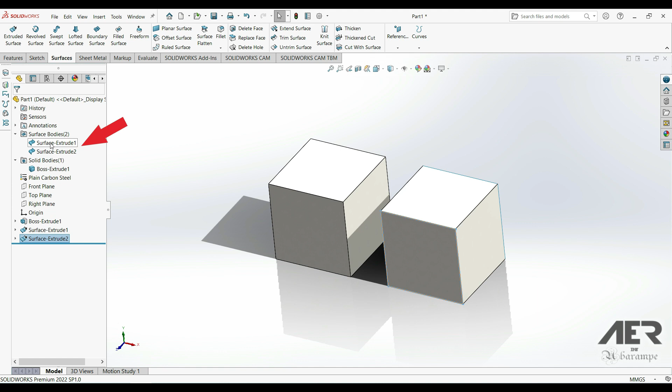So we're just going to quickly recap everything we've covered in regards to SolidWorks surfacing. In the introduction, we made that cube, and we looked at the differences between solid modeling and surface modeling. We talked about first making an outer shell out of surfaces, and then knitting those together, and using that to create a solid. We also mentioned that surfaces have no thickness.

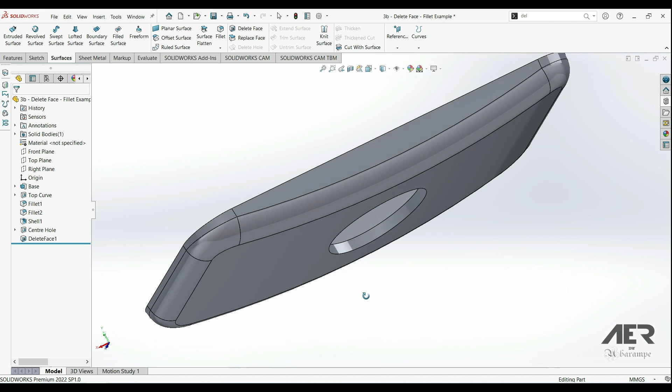Then before we actually started surfacing proper, we looked at the delete face tool. This is great for removing fillets or adjusting holes and openings in parts. Then the move face tool was quite similar in a lot of ways, but this one allows us to offset, translate, or move or rotate faces in any direction. So it allows us to very quickly adjust pre-existing parts. And it can be useful for imported parts where we don't have access to the feature tree.

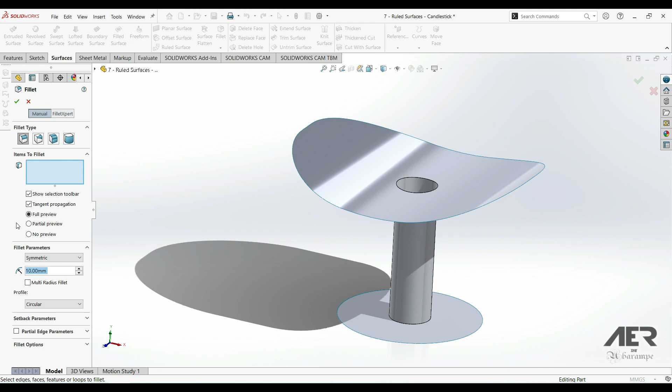After that, we made our first model, the candlestick holder. This was quite a simple one, but we learned a bit about extruded surfaces and how we can trim them. We also looked at the ruled surface tool, which allows us to easily add material in a specified direction. And then we knitted all of the surfaces together, and we saw that we can easily fillet the edges. And then finally we used the thicken tool, which is a great way to convert our surfaces into solids.

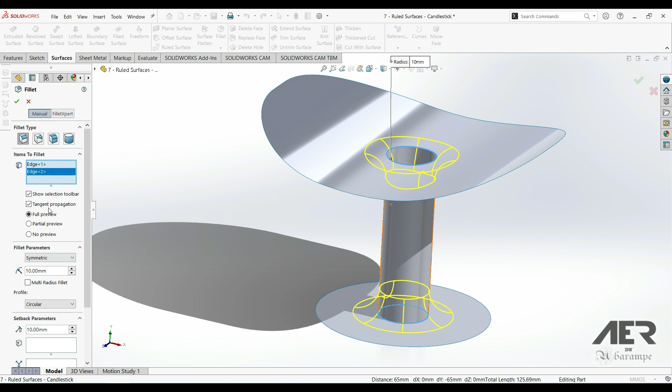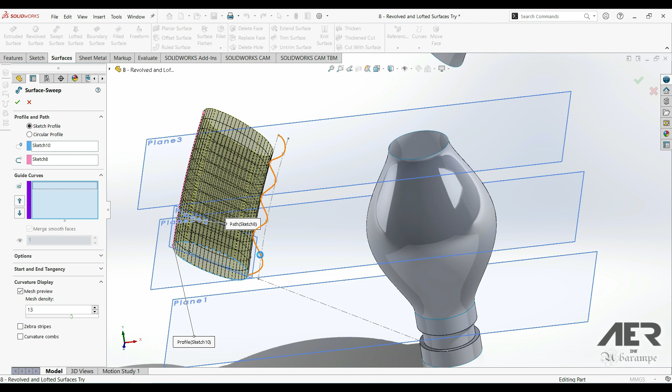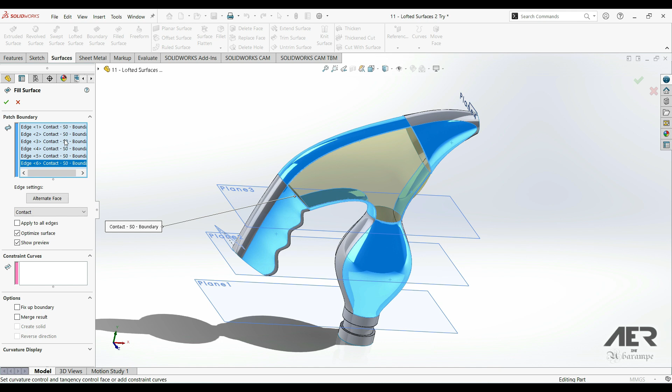Next, we developed the model further by connecting the previous surface bodies using more advanced lofted surfaces. To help create these, we used the split line tool to split surfaces down into smaller multiple faces. Then we also used the filled surface tool, as well as planar surfaces and mirrored surface bodies to close off the sprayer body, so we could either knit it into a solid or we could use thicken.

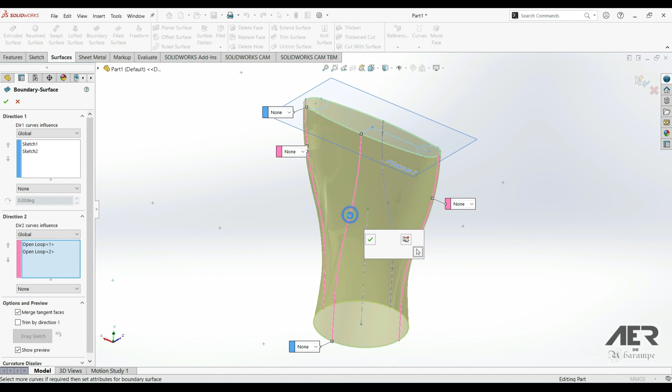For the next model, we learned about the boundary surface tool. This is a bit like the lofted surface tool, but it's a bit more powerful as we can control direction 1 and direction 2 separately, rather than just using profiles and guide curves. We used this tool to create the vacuum cleaner nozzle, and then we developed that model further, looking at how we can use things like project curve to make curves, and we also looked at the offset surface tool and the different ways we can use that.

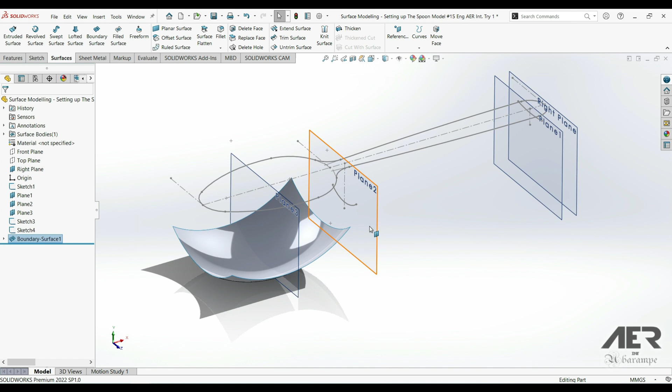Next, we practiced some of the tools by making the spoon model. First, we set up all the construction sketches, and then we used the boundary surface and lofted surfaces to make the spoon shape. We also learned how to use the selection manager and the extend surface tool before trimming the spoon shape and then using thicken to create a solid.

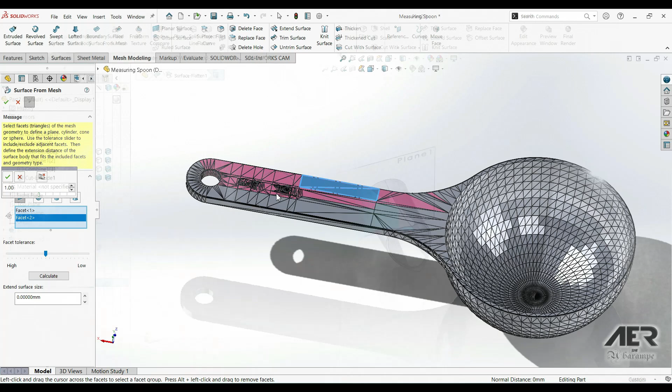After finishing the spoon model, we got into some of the more specialist surfacing tools, starting with surface flatten. We can use this to flatten the surfaces, and it can be useful in lots of different ways, especially things like creating labels or decals or making templates for prototyping. Next, we briefly looked at the surface from mesh tool that allows us to extract surfaces from 3D meshes like STL files, which are normally used for 3D printing.

Then came the freeform tool. This is a very powerful way to get organic looking shapes and surfaces. We can then use these for things like cut with surface or thickened cut. And those were the final two tools that we looked at. So that's everything we covered in this course. As we mentioned, we don't always have to use only solid modeling or only surface modeling. It's usually good to use a combination of both sets of skills to get the end result we want. Surfacing is really just another set of tools that we can layer on top of our basic solid modeling.

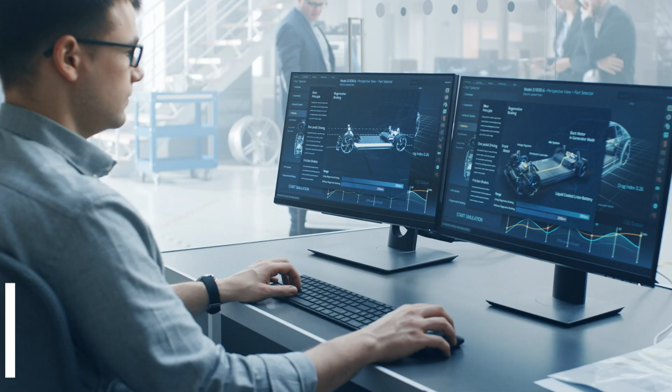And then for the task we can work on to complete this course, please just create a surface model using the skills we have learned. Look at items around us, at your home or workplace, and find one that is particularly suited to surface modeling. Then set yourself a challenge of modeling this item.